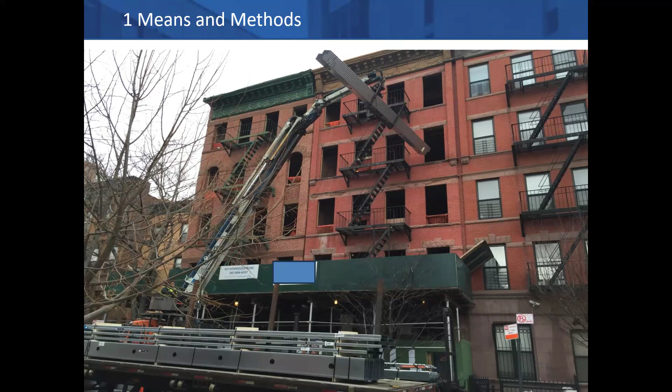So this is a good photo of means and methods. Someone smart said, hey, let's do this. Let's order all of our joists to be delivered, as long as the loading's okay, and we'll get a boom truck and we'll deliver them through where the windows are going to go. Don't install the windows yet, because we need to consider the means and methods. So this illustrates what I mean. It's not what's going to be done. It's how are we going to do it.

Another example is when you're getting your sheetrock installed, you're going to boom that in as well. If you lean it up against the wall, you can't install the sheetrock on that wall. So it should be laid in the middle of the floor, which means the middle of the floor should be broom clean, perhaps some plastic down. These little details are what a great contractor, a great super knows and sweats. Those little things will not delay the project and allow it to move along. So have you leaned the sheetrock against the wall, or have you put it in the middle of the floor so we can sheetrock that very wall?

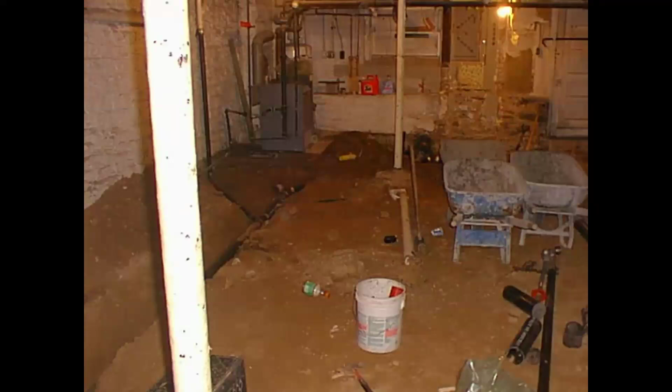Another good example, you're working down in the cellar. You have to put in underground piping. We need to get the dirt out. Well, this is an existing building renovation. Guess what? You're going to have a bucket brigade. You're going to fill spackle buckets and move them out of the building. Have you considered that?

You know, on a new construction site, we've had projects where we've had midtown buildings where they have held out installing a part of the building until they got the chiller and the generator dropped down into the basement. Although the generator now wouldn't go in the basement; with the new post-Sandy code, it's above grade. But the point is, we need to think about these things much earlier than we think we need to. And that's a great super. I can't stress enough how the boots on the ground, great super knows all of this.

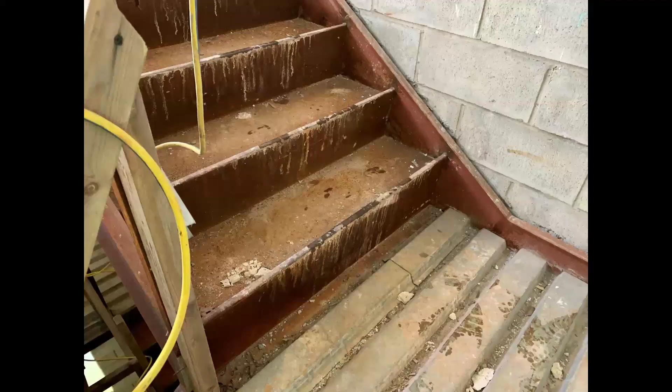Okay, you've got your stairs installed. That's terrific. You've got your steel corrugated decking. You haven't poured concrete yet. However, have you gone through and put wood or some other material so it's a safe, non-tripping hazard way to have workers move in and out of the building? Means and methods.

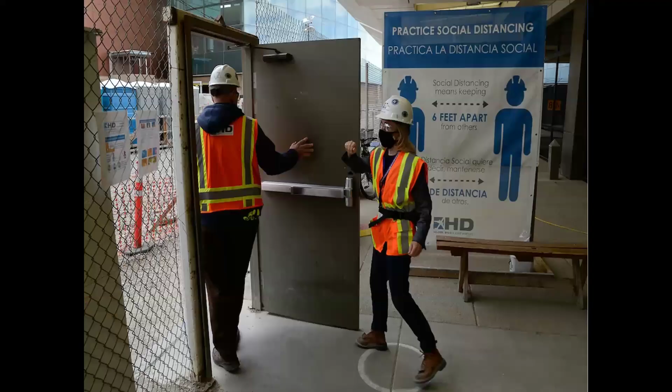Great example of means and methods was during COVID. Fascinating study in means and methods during COVID. What happened? Well, we all know what happened, but I'll give you a couple stories from our vantage point, which I found very interesting. First of all, COVID hit, and it was different in different parts of the country. I will admit that. However, I'd say in New York City, for example, New York City did a very good job of getting installed safety measures and ways we need to think about how can we keep building.

One of the things I found very interesting was not just masks and all that. We all knew that. But what was fascinating is that in the matter of a day or two, we started getting a lot of phone calls from our supers. And they were saying, hey, you guys need to do an inspection, right? And I said, yes, a requisition inspection. And they said, you don't need to be here during the day, do you? Meaning you're not working on the building, you're inspecting the building. And I said, okay. They said, can you come early morning, at night, or on weekends? Because I need to control the flow of traffic on my site, and you're not needed during business hours.

So we started doing a lot of inspections early in the morning, at night, or on weekends. And it was a good compromise, means and methods. It was a way that the super saw the project moving ahead in a way that was not on paper. It was, how do we get this accomplished, not what are we going to accomplish? The other thing they did, which I found very interesting, is they would segregate parts of the building by trades. There were a couple projects in particular, I remember I'd go in the trailer and they'd have color-coded plumbers on the 4th floor today, sprinkler on the 5th, framing on the 6th. So they would separate the trades to control their traffic.

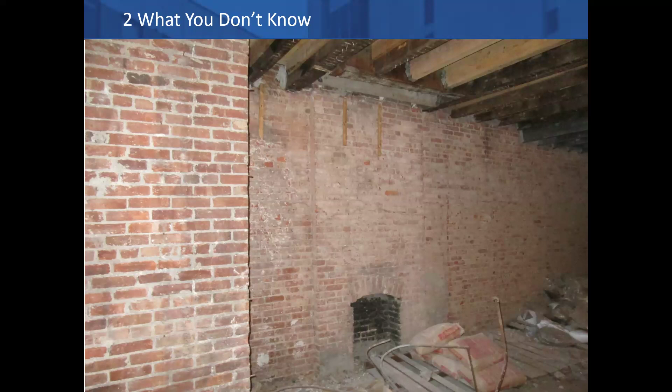Number 2 thing to look for: what you don't know. Now, this is not what you know. We know what we know. We don't know a lot, and particularly for renovations, we don't know a lot. But always think about, what do we not know yet? What do we not know yet?

So, for example, on a renovation project, a nice pre-war building, I like surprises from the standpoint of teaching. I don't like them as much as a consultant. Fireplaces, perfect example. This was one of my buildings. We didn't know there was a fireplace. No one knew there was a fireplace. The top of the fireplace was capped and cut at the roof decades ago. We took off all the framing. Guess what? There's a fireplace.

The nice thing about fireplaces is they're nice little pieces and you can fix them up and all that. The problem with fireplaces is there's a flue behind that wall where the smoke would go up. So now structurally we need to say, is there a change coming here?

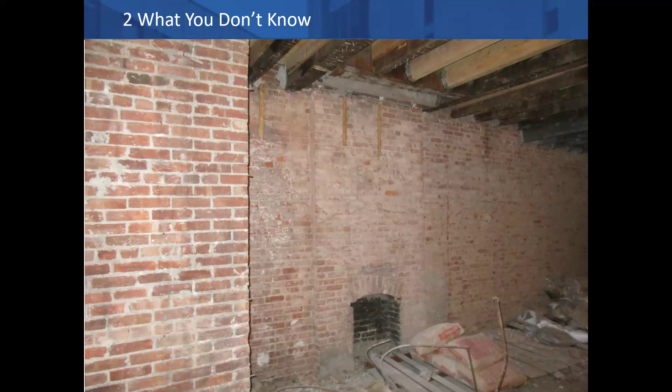So what you don't know, and of course, as you're connecting dots here, in your gut rehab you're not near as worried as you are in your light rehab or your mod rehab, because anything we're keeping is a potential delay, cost, or issue. So until you get those walls, floors, or ceilings opened up, we don't know what we don't know. Now we have guesses. We know what similar buildings have looked like and how they were constructed, but you really don't know for any building what you're going to find.

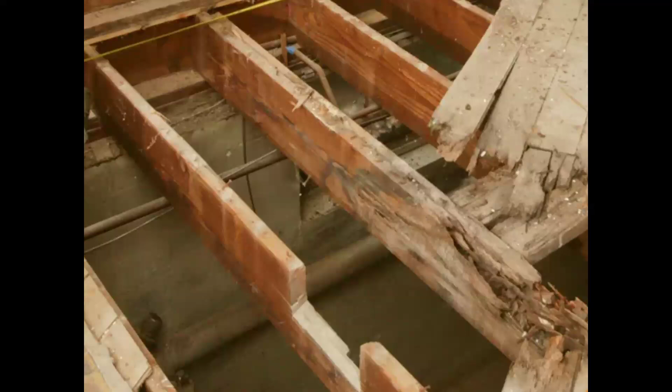A perfect example is how joists are cut and damaged. Now, this is an old pre-World War II picture of joists. Well, the picture's recent, but the joists are pre-World War II. The good news is with wood like that, if it's not damaged from notching, fire, or water, it's stronger than wood you'd get today. Because this same joist you'd get today from a lumber house is a 20-year-old farmed tree. That wood you're looking at there was a 100-year-old natural tree, better wood than today.

In fact, there's buildings I've been in that have uncovered undamaged wood joists that are 100 plus years old and are as straight as the day they were installed. Great, strong wood. The longer you grow wood, the hardier and stronger it is, which is why Canada gives us a lot of our hardwoods and a lot of our structural wood. We do a really good job in America making wood. Canada is a little better as far as those longer growth woods.

So what happens with this? Well, we've got notched joists. We've got dry rot, which is wet wood that then dried. This is an issue. Did we know this going in? Did we see this going in? Was it all covered up? I don't know. But what you don't know is going to become an issue to deal with.

I was doing this seminar once and I had someone ask at the end, were they allowed to notch those joists? Yes. There's kind of rules of thumb, which usually your architect will go along with. Typically speaking, you could notch your joist to a depth equal to the width of your joist. So if that's a 2.5 wide joist, you can go down 2.5. You can go through the middle of it as long as you're in the middle third, cored out, usually a circle for like a pipe. So there's some rules of thumb that allow you some liberty with notching, not this much.

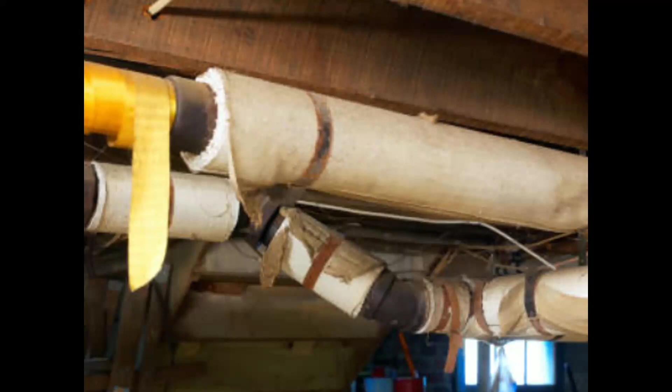Now, I would caution you, where are you going to see your joist issues most often? 3 areas: bathrooms, kitchens, cast iron radiators, because those are your wet areas. Typically speaking, that's where you're going to see your biggest issues. Another one, of course, I could do a whole topic on this, is environmental. Asbestos pipe lagging. That's a big one.

Asbestos is, at a microscopic level, little hatchets as opposed to spheres. So the good news is they bind together and they're very, very good fire retardant, which is why we used them for many, many years in things including pipe lagging or pipe insulation. But it's the same reason why if you breathe it in, it's a cancer-causing product, because it'll really do damage. So asbestos is an obvious issue.

You should never, ever, ever be touching or moving asbestos like this unless you are a licensed, certified person that can do this. There's 2 kinds of asbestos: non-friable and friable. Non-friable, just think of it as liquid or solid form. Friable, what you see here, is airborne. That's your issue.

Looking at asbestos is not going to damage you. Breathing it in is another story. So environmentally, always ask, where are we with environmental? Asbestos testing, lead-based paint testing, mold, PCBs. Where are we with environmental testing? What you don't know will probably be something that's going to hurt if you don't have that full investigation.

You can encapsulate asbestos pipe lagging, but that assumes, of course, that you're not changing the pipe within, which is not usually an advantage we have. So ask about environmental issues. You should never have demo going on at the same time as environmental unless they're specifically trained that way and they must operate that way, because your demo sub is separate from your environmental sub. By the letter of the law, your environmental sub finishes their work and it's a quote unquote clean site, and now you can do demo. Unless they're intertwined, then you must do them together.

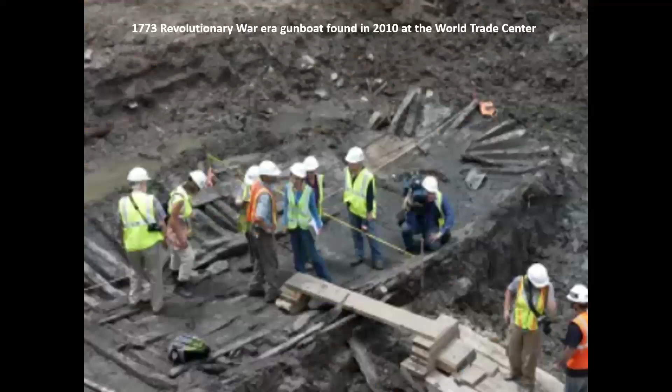Here's just an interesting picture. When they were doing the Freedom Tower excavation in 2010, they discovered a 1773 Revolutionary War era gunboat, which you could sort of see right there. So there's something that they didn't expect to see. And that's what I'm going to end with, what you don't know.

If you're doing new construction and you're thinking, Oh, well, Ken, I'm doing new construction, I don't have to worry about any of this lead-based paint or joists. Correct, but you do with earthwork. And earthwork is going to be about 65% of your change orders. Until you get your foundation done, you have surprises that could pop up.

Now, I'm guessing most of the time you're not going to find a 1773 Revolutionary War gunboat, but you are going to find previous foundations. You are going to find urban debris, like bricks, etc. Unsuitable soils. The water table might be higher than you thought. You might hit clay. You might hit rock. There's a lot of things you could hit when you're digging. So the question there is, before we start digging, what investigation have we done? What geotechnical work was done? And do we feel it's adequate to assess the risk properly for what we're about to start?

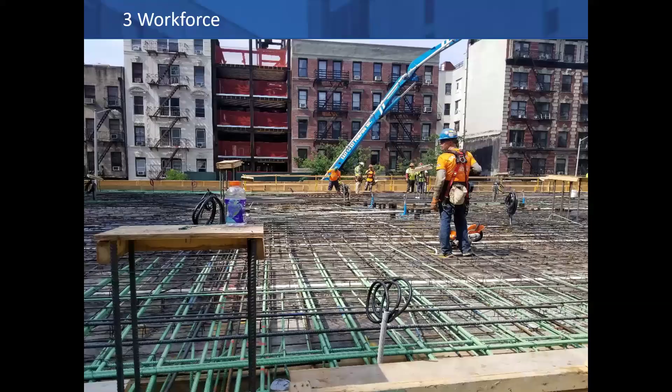Number 3, what else should you look for? So we were looking for what we don't know. We were looking for means and methods. Workforce. I know how just incredibly obvious this seems. And I know that it sounds like we're getting into the very common sense era of the presentation. You're right. Workforce. Look for workforce.

Now, the good news is the great supers have good relationships with their subs. They've lined them up. They pay them well. They take care of them well. They communicate well. They make sure they have a safe workspace. And those subs are coming back tomorrow. They are absolutely coming back tomorrow. So your better supers and your better contractors will always have better subs and better workforce.

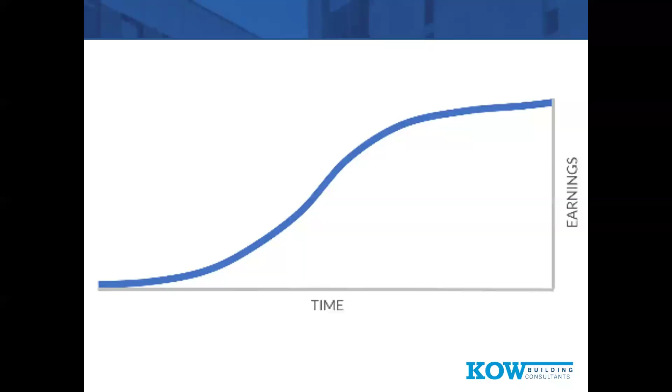Is this the same with the renovation? Could be. And it could be only because you might have demo, that's your starter, and then you're doing framing, all your rough mechanical, etc., and then you're doing your finishes. But it's not going to be as S-curved as this. It'll be a little more straight lined.

We like to see supers, and you should as well, that have great organization. They have toolbox meetings. They have safety meetings. I was at a project a number of years ago, very good New York City affordable housing developer, and I happened to show up early on site, and the super said, I'll be with you in a minute. And he said, hey, come here. I want to show you what we're doing. And they had someone at the front of the room doing a 4-hour scaffolding seminar and certification for the workers, and the workers were in 3 groups.

The middle group was English. Over to the left, there was someone translating into Spanish, and over on the right, there was someone translating into Chinese. And I went, this is a good way to have a safe site. They literally trained and certified people on site before the workday. That's rare, but that's how you get your workforce all on the same page.

If you're doing a big building, you should consider that it's going to resemble a little town, a little village when you have 300, 400, 500, 600 workers on site. We had a project a number of years ago, I won't name names, big skyscraper, ground up Manhattan. There were 3 subcellar grade levels for parking. And I went down at one point and I noticed that what the subs will do is they'll often build shanties, and a shanty is like a wood structure with a little swinging door, where you could put your bag and your lunch and all that, and you could lock it up.

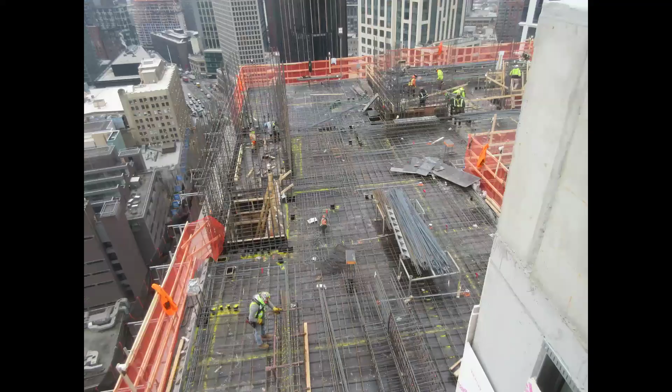This is a good example. I actually took this photo. This is a project I'm on, and it's interesting because that right there is, I don't know, maybe the 16th floor or something. That floor right there has about 12, 14 workers on it. That's about it. But I can tell you, when that concrete is poured, you're going to see 4 times that, because now you could advance doing framing, mechanical, etc.

So it's little things like that that we know from experience to keep an eye on when you staff a project. But it's a really good one for you to keep an eye on. What is your workforce? What should it be? And how is it trending?

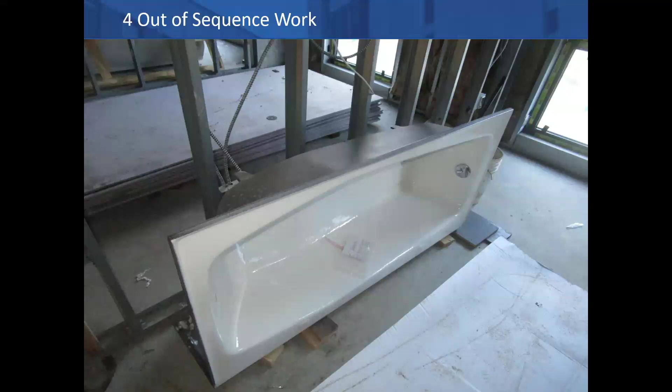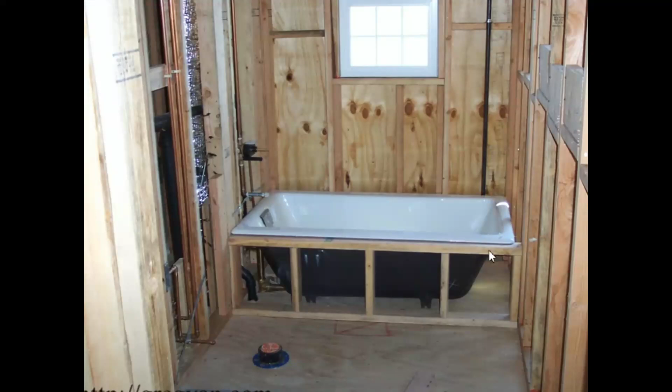Okay, what else? Out of sequence work. It's not illegal. It's not against code, but the hairs on your neck stand up. Out of sequence work. Look for this. Wonder why this is. If you see tubs sitting around as opposed to installed, ask why. A tub's a delicate fixture. We like to bring it in early because it's easier to set and then build around it, but we want to see it set. We don't want to see it sitting. If it's sitting, the right hand and the left hand weren't talking, and we didn't have a home for the tub when it was delivered and brought to site.

Why is that? Out of sequence work. Why is that? Maybe it's poor communication. Maybe the sub's not being paid. Maybe the person who's running this job is in over their head. I don't know why, but I do know out of sequence work is a question now. It's a question we're going to start to ask.

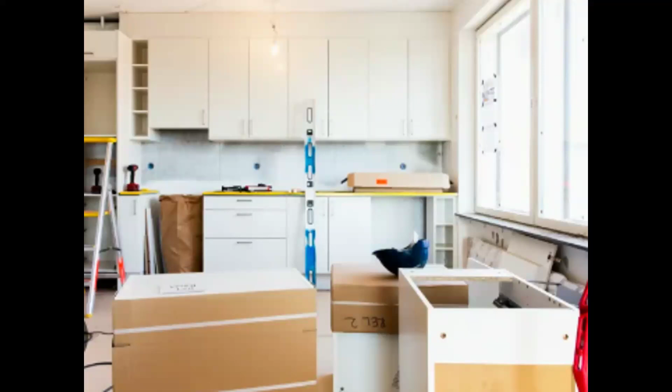And if you do one thing out of sequence, that's okay. If you do a few, now I notice a trend. Now we're going to have a discussion. Did you get your cabinets installed before or after your floor? Or did you install your floor and then set your cabinets on it?

When you have your hoist, did you properly schedule your work so that you could complete your elevator work, get your elevator signed off, and therefore remove your hoist? Out of sequence work, scheduling that properly. I'm going to go over this a little more in a moment, but that's one we look for, because here's a reveal, a cheat code, a little sneak peek. The elevator work and the hoist work is a critical path, which I'm going to go over in a few minutes.

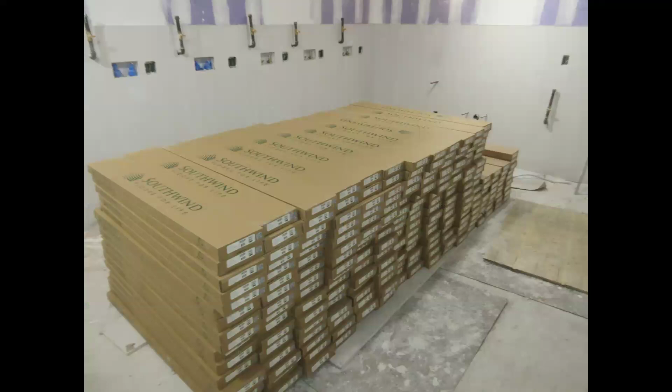Out of sequence work also could be something that's in sequence that they're doing ahead of time. For example, a lot of flooring, back in the day, not that long ago, when you did number 2 oak, you'd bring the wood to the site and you had to let it sit for 2 weeks before you installed, because you wanted it to get acclimated to the site conditions. Then you'd install, sand, and do 2 or 3 coats of poly. Most of the flooring we see now is pre-finished or a luxury vinyl tile.

But if products need to be on site and acclimate, again, it goes back to the means and methods, and it's not out of sequence as much as we need to bring it in before we need to install it, because it needs to get acclimated. So that's the planning mechanism. How have you sequenced the work so you're thinking ahead 2 weeks, 3 weeks, 4 weeks?

It's one of the things we like to ask contractors all the time. You'll say, give me a 4-week look ahead. And we're not looking to set contractors up, but every contractor, when you say give me a 4-week look ahead, 1 month's easy to predict. They'll say, oh, okay, in 1 month, let's see. Here's where I'll be. In 1 month, I'm going to be done with the 8th floor framing. I'll be up to the 6th floor, and they'll give you all these things they're going to have done.

And then in 1 month, you can see, how do we do? The really good contractors, when you do the 1 month look ahead, they're even telling you things for delivery that they need to get acclimated or on site. They have that already thought out in their head.

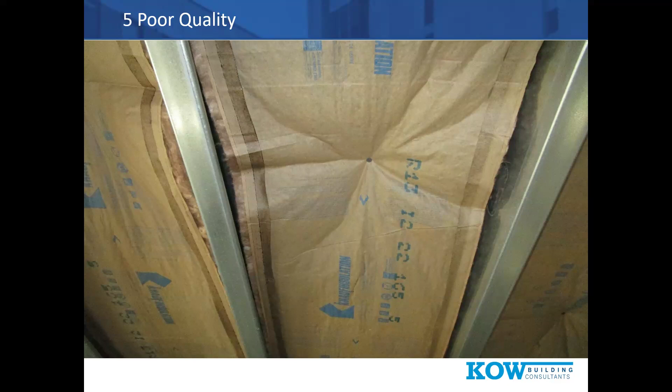So we see insulation with a screw in it to hold it up. There's a lot wrong with this. Not to mention, your insulation needs to be the full width that it's installed at, and it needs to have those flanges overlapped and installed to the stud. So poor quality, we are on the lookout for this all the time. How it's installed, the workmanship of it. Again, this could be its own webinar. This could be its own 2-hour, 10-hour.

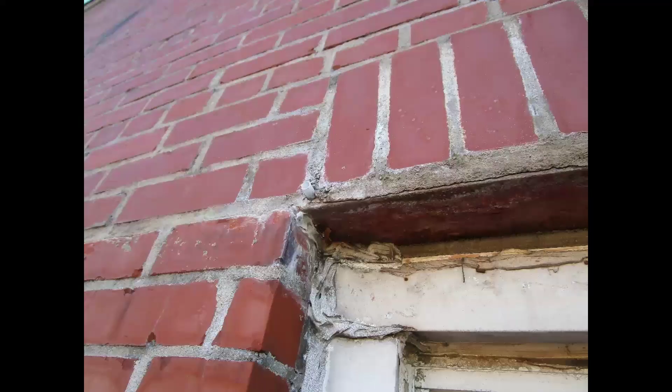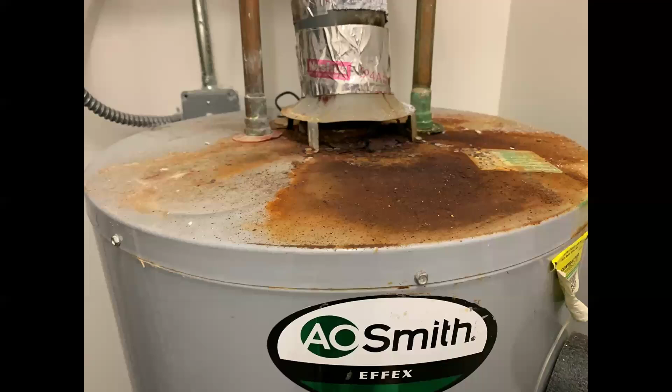If it looks wrong, it probably is. And I know that's a very non-technical way of explaining it, but if it just doesn't look very good, it's probably poor installation. And by the way, I would argue the opposite is true as well. When I walk on site and I walk through the front door and I look over to the left and I see the fire sprinkler sub is there, and they've got all their pipes lined up by diameter, all their 90 degrees lined up by diameter, all their flanges lined up by size, I think this is going to be a really, really good site. This is going to be a good installation.

When you go into an electrical sub panel and you see everything's just beautiful 90 degrees and it's labeled and it's consistent and it's clean, that's a good electrician. That's a quality electrician that you want to see. So what I'm saying, the opposite applies.

This is an example of a pretty new building, water heater in a water heater closet. It's a gas water heater. That's why we have a flue here. Personally, I would have made this electric because it's in the middle of the building with no windows, no ventilation, and they had a door without ventilation. Well, guess what? I got news for you. You're pulling a lot of draft out, and the rust is showing you where the moisture is. Rust always shows you where the moisture is. So this is a problem.

This water heater in this mechanical closet was not properly ventilated. And this is a property condition report of a few-year-old building. You could also see how the copper is already starting to show some green patina on the right side in particular. Why? That's where the moisture is. That's where it's telling you. It's showing you a fingerprint of where the issue is.

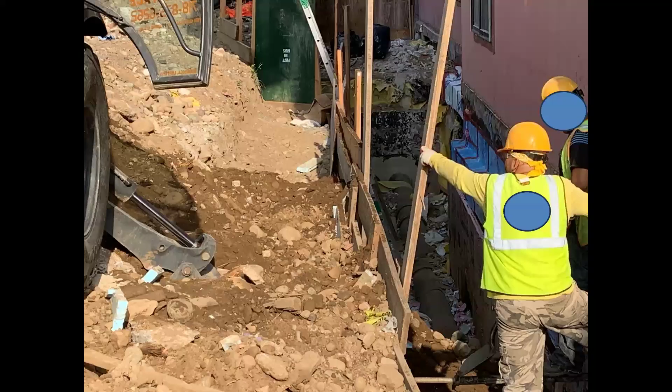Another perfect example. Doing earthwork, you're going to backfill all your dirt back up to the building. There should be no garbage or debris in that hole. And look at that. It's a disaster. Now, I'm not saying they're backfilling today, but when you backfill, you don't want anything that's biodegradable or organic that's going to decompose and lose its volume.

Perfect example. When you see a cul-de-sac that's built and structural, especially back in the day when we didn't check this as well as an industry. Maybe someone lives in or has seen this. You go and you see all these new houses that were built in the 90s, and they're beautiful houses. Maybe they're McMansions, and they're structurally fine. But you look at the walkway from the driveway to the house and the pavement, and the walkway is kind of differentially settled. Why is that?

That concrete walkway is not very heavy compared to the building. That's not why it's settling. Because on a lot of those buildings, they would grub and take out all the trees to build the building, and they'd bury them. They grind them up and bury them. You can't do that. When you bury trees and roots and growth, it'll eventually decompose, therefore lose volume, therefore anything above with weight and load is going to settle. That's why we don't bury stuff like that.

But that was a big problem. We do a better job as an industry watching that today. But the interesting thing is they thought, well, we'll just bury it under the sidewalks. Those aren't very heavy. Doesn't matter. You're going to lose volume.

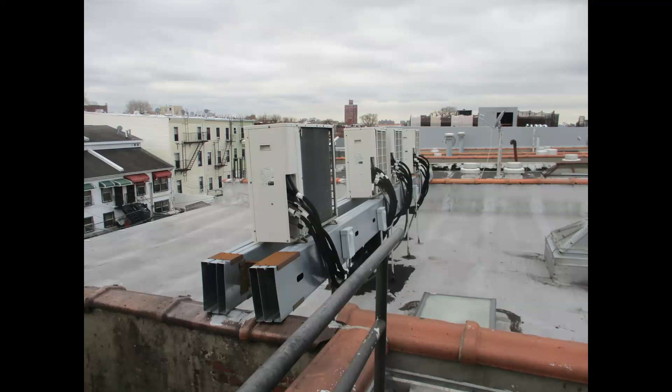Here's another one that's a pet peeve of mine and should never happen. So this is a flat roof. Well, it's not flat, essentially a flat roof. They've got condensers up on the roof for cooling. That's obviously added on much later than the buildings were built 100 years ago. Nothing wrong with that. However, they have non-rated steel out on the roof bearing right on the coping stones. That's a no-no. Coping stones are not supposed to have load right on them.

Now, you could have designed this and attached these right to the side of the parapet on the interior, but this isn't even a permitted job. This is just a terrible way to support these. It's a mobile load. These move and shake, and no one should have ever allowed or approved this. This is a property condition report, but it's still indicative of a poor quality installation.

It is bringing water from the layer, or the air width between the brick and the backup of the building, down a waterproofing member and outside the cavity. Whenever you hear someone say, oh, it's a cavity wall system, they're telling you it's brick, air, building. That's the cavity. Brick, air, building. Now, our pre-war buildings were not cavity wall systems, but your new energy code requires it if it's brick.

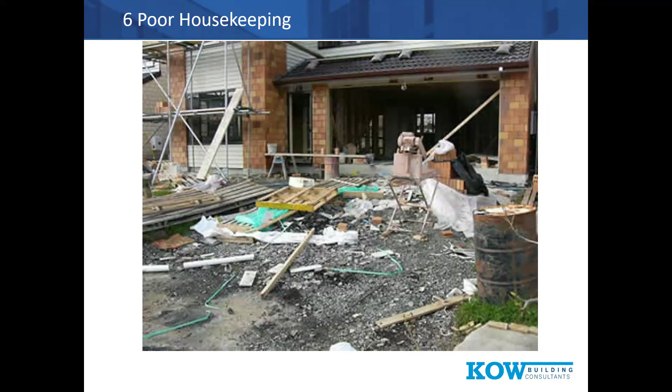So poor housekeeping. It's probably the lowest tech thing to look for. And boy, I can't even tell you how true it is. When you see a well-kept site, you're going to probably see good installation. It's also not going to damage your installation because of a messy site or get you stop work orders or violations from your building department.

We had a project a number of years ago, and this doesn't happen very often at all, that was taken over. The contractor was thrown off site, and it was a disastrous project from a housekeeping standpoint. And the new super came in, and there was a meeting with everyone, and he said, you need to give me a month. I don't want anyone to bother me for a month. I'm going to meet with every sub. I'm going to walk every square inch of that site. Give me 1 month. I don't want to answer to anyone for 1 month, but after that month, get ready.

So we went back after about 5 weeks, gave the month, and I didn't even recognize the site. I mean, it was just completely cleaned, organized, lit up, well run, and the subs came back on and just started cooking. So that housekeeping concept, your great supers, they know. They know that's a cheat code.

Unsafe conditions. This one drives me nuts. So this was a real picture. I'm not naming names. I don't kiss and tell, but I will say this is a real project. And before I even opened my mouth, the architect turned to the contractor and lit him up. And I said, okay, good. That's what should happen. This is the 6th floor of an elevator shaft.

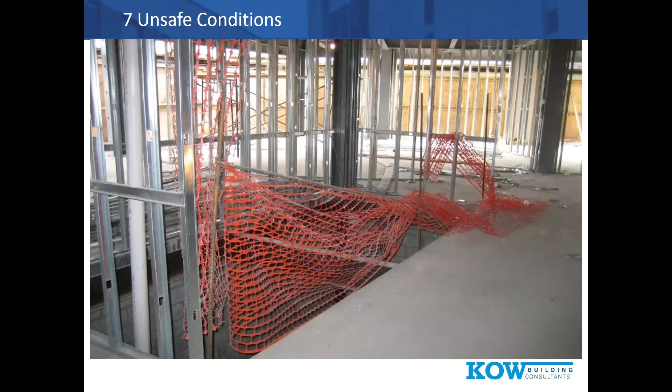So congratulations. You not only don't have a rigid barrier up to 42 inches, but you have a tripping hazard into a 6th floor of an elevator shaft, which after you're 60 feet down is a poured concrete slab. And it's right where a stair lets out. So some poor guy is coming down the stairs holding debris or tools or materials and doesn't see this. Unsafe conditions. It's generally something that is maintained well, but it's a constant thing we look for.

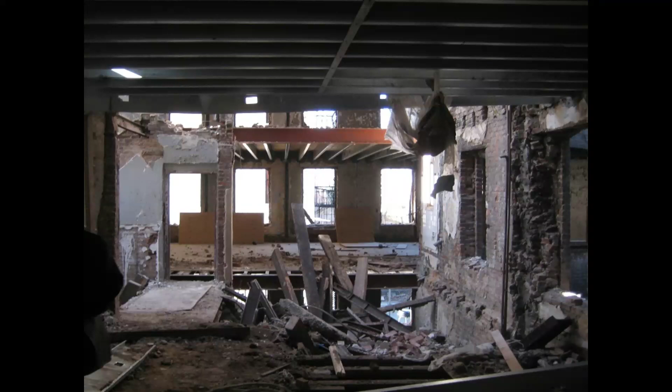Your biggest unsafe conditions are going to be roofing, facade, demolition, which makes sense. Roofing and facade because of your height. Roofing work is not dangerous. It's just dangerous because you're up 20 or 50 or 200 or 300 feet. Same with facade work. Brickwork is not inherently dangerous if you're standing on the sidewalk. It's the fact that you're up off the ground many, many feet. Demolition. Demolition is the most dangerous trade there is.

Particularly if you're doing a replacement of new, like the top of the photo, with old, like the bottom of the photo. Now, by the way, this is a controlled access zone, CAZ. If you're thinking to yourself, Ken, you shouldn't even be able to get close to this, you're right. There was actually a hard barrier. I couldn't go anywhere near this, which is how it should be, because I'm not a controlled demolition worker that's actually performing the removal.

So the answer is no, I was not able to get closer. And the reason is because it's a controlled access zone. But they're very dangerous parts of the job. Demolition is a very, very dicey part of the job. And it's why they work alone before other workers come back on site.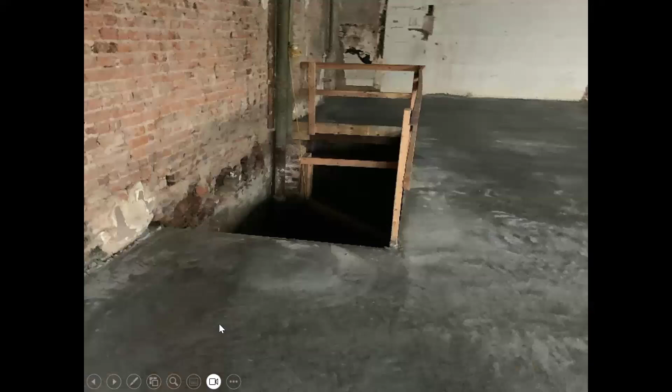This is one that I kept in because I think it's the reminder for all of us. Every year, New York City has something in the spring called Build Safe, Live Safe. It's a very, very good get-together. And one of the things they do, which is very morbid, but it's needed, is they show construction deaths on New York City construction sites for the last year.

And the thing that would surprise you if you've never attended or seen it is most of them are 6-story and below buildings. They're not 40-story towers. They're not 60-story buildings. They're not your big, big skyscrapers. And the reason is the real quick theory, in my opinion. That's what I call it. And it worries me as much as anything for construction worker safety.

Real quick, let me just shimmy around this chimney. Oh, real quick, let me hop over this shaft to grab my tool belt. Real quick, let me move this barrier because I'm loading something down to the cellar. And that real quick moment, that's all it takes. So this was a very honest mistake. They removed the barrier. They were loading something down to the cellar.

I show up the next day. It's not there. I said to the super, what's going on? And he saw immediately. He said, don't move. I took a picture and he corrected it. But this, I think, illustrates just how tough it is for a super. It's an everyday, ongoing, every moment thing. And it's unfortunate that it's a very, very real stress in their life, but it's that real quick. That's the one that worries me more than anything.

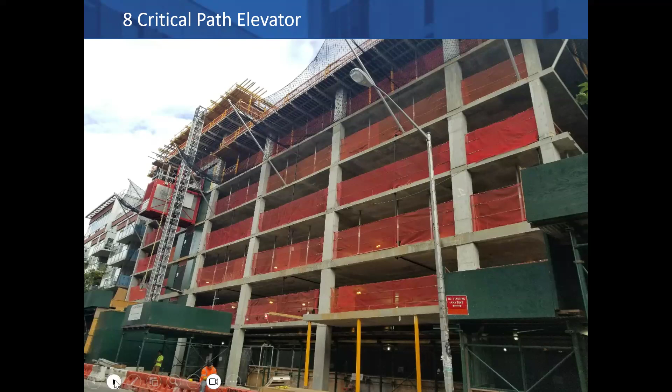Can you get in New York City a certificate of occupancy excluding the hoist run apartments? Yes, you can. It probably tells you someone screwed up somewhere with scheduling, but you are allowed to do that. But your elevator is a critical path. Once the building's built, we start asking, when is your elevator work starting? Because that's a critical path. You need your shaft to put your equipment and your power.

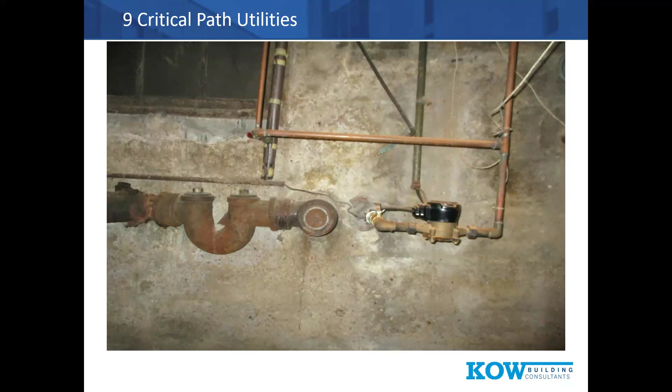What's another critical path? Utilities. And the reason utilities are a critical path is, unfortunately, it's not up to the contractor or developer. We need help. We need Con Ed. We need gas service. We need approvals. We need the street dug up by someone that we don't control. I say we as in the development team. So utilities. So you see here on the left, that's a sanitary main. You see on the right, that's a water main. There's fire sprinkler, there's electric, there's gas.

So your utilities, I would say to you, when you get to literally 50%, certainly by 60, 70%, start asking, just like we do, hey, where are you with utilities? And a good super is going to say to you, okay, here's where we are. And they're going to give you the rundown. And by the way, do you get your utilities in a certain order?

Sort of. And the reason is, you need to have water in your building in order to have electric or gas, because how would you fight a fire if you have electric or gas and you have a fire? Well, you can't have water until you have sewer, because how can you put water in a building with nowhere to go? So the utilities sort of follow each other, but the ones that usually are the biggest issue are gas and electric. So I would say to you, when you hit 50% on your big projects, start asking, hey, where are we with utilities?

Now, it should be happening a lot before that, but that's kind of when you should start to ask and push. And if you have a project that has a Con Ed electrical vault, start asking at 10%. And the reason is a Con Ed electrical vault, or an electrical vault where Con Ed serves, like New York City, is a big shutoff box under the street. It needs 16 approval signatures to get installed and takes 18 months. You didn't mishear that. 18 months, 16 signatures.

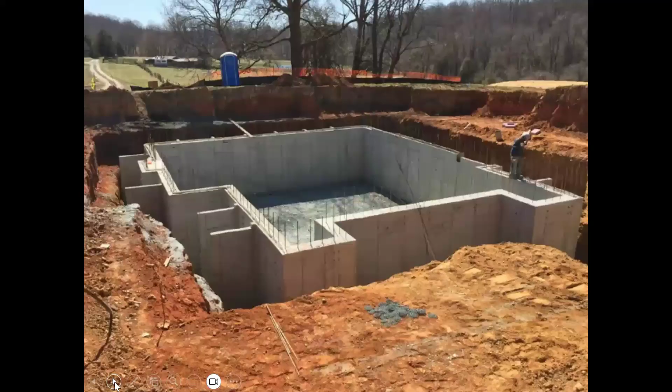Number two, foundation done. And this is a small building, a single family, but this is a really good picture because it literally shows you the difference between working in the earth and working in the air. Once this foundation is complete, we're now working in the air, and we love that because we don't have surprises in the air. We could have surprises with physics as far as structural is concerned, but we're not going to uncover hidden issues in the air as much as we are in the earth.

So foundation complete. By the way, the waterproofing is not complete, but that doesn't matter because the hard part's done. The foundation is structurally built. Superstructure complete. So when we go all the way up, the good news is on a bigger building, we're not waiting till we get to the top. We're coming right up from below with framing and all the mechanical trades, but superstructure complete, great milestone.

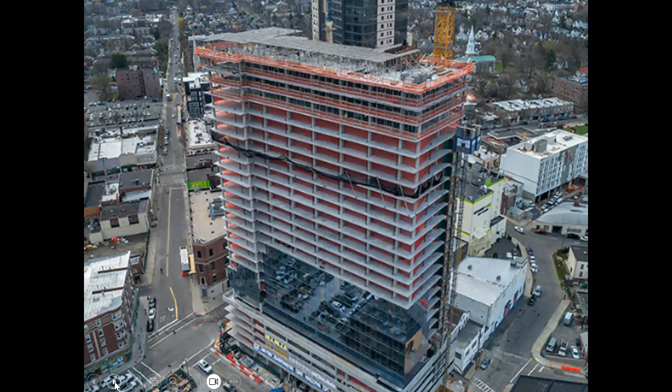Temporary waterproof. It's not permanent, but it's going to keep water out and keep conditioned air in if we want to heat, so we can work inside. We're now exempt from the elements, and that's the key. And by the way, in New York City, typically December 5th is the first day we start worrying about freeze-thaw and winter issues. We had a really rough winter this winter. Keep an eye on your schedules next year. I think you're going to see some winter days worked in because we got lazy the last few years with mild winters. But this winter has reminded us, you better be ready for three things: wind, snow, and cold.

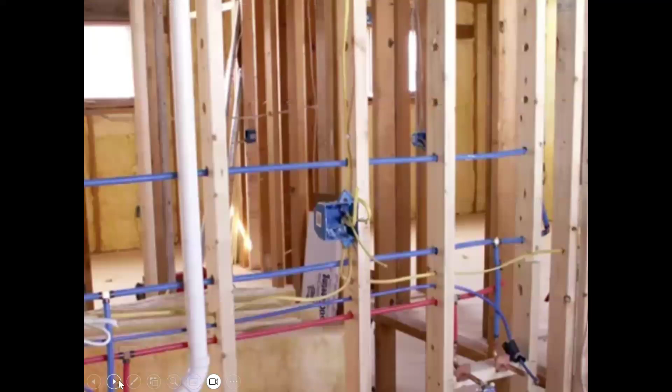Rough framing, rough mechanical, windows, walls, floors, and ceilings closed up. Okay, now we're really feeling good. Now our risk has gone way down. Now it's a finished product. It's more precise, but it's a really good milestone. And then you get to elevator completion, substantial completion, and punch list completion. So I hope this was helpful to give a little bit of an idea. You're out on site. What are you looking for?